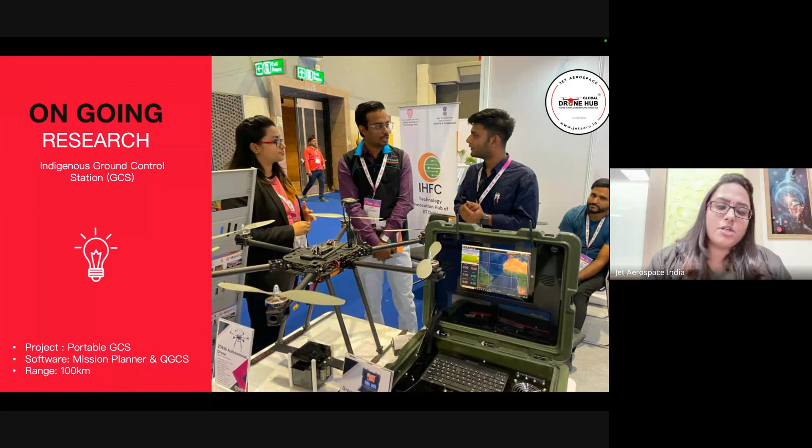We also have a project where we are working on our indigenous ground control station. A portable ground control station that can support the open source ground control station software, with a range of about 100 kilometers, that can be utilized for logistics and many other industries. That is the main idea behind the research work.

So some of our skill development projects. We are working with the Technology Innovation Hub of IIT Delhi under DST for the nurture program. We trained around 25 to 30 colleges and around 2,000 students last year. They all belong to the less privileged category. So it's technologically developing the people who require this technology. That's what we tried with them.

And these are the drone technology boot camps which we conducted at NIT Silchar, part of the capacity building program of the Ministry of Electronics and Information Technology. We also work with Tamil Nadu Skill Development Corporation. We are part of the Naan Mudhalvan program. Last year we conducted training for around 8,000 students along with this body at around 145 to 150 colleges in Tamil Nadu.

We are also working with Kerala's Department of Public Education. They are establishing drone skill development centers throughout Kerala in government schools. We have supported their COE, that is Center of Excellence for Drones, for the drone service technician trade. We have established this in one of the schools, and we are expanding the same throughout Kerala.

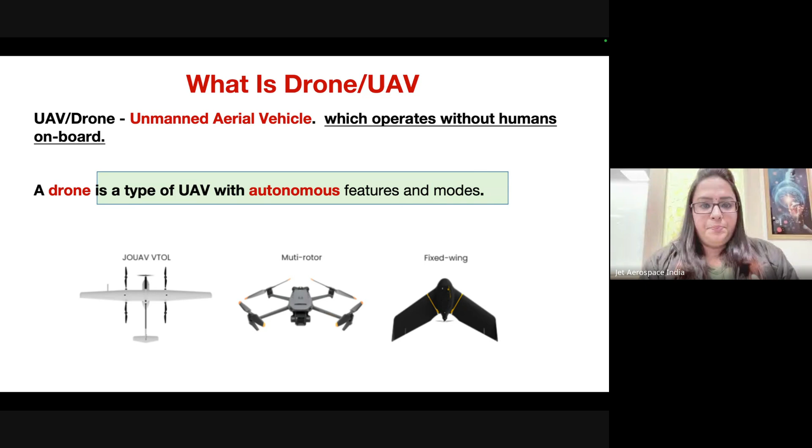We have given three pictures, a VTOL UAV, a multi-rotor, and a fixed-wing UAV, for understanding the different terminologies. An RC plane or fixed-wing UAV looks like an aircraft, works like an aircraft, and follows the aerodynamics of a real aircraft. It's remotely controlled. The term UAV generally represents any aerial vehicle flying in air without human beings. And of course, drones are capable of working with certain autonomous features. That's the key difference between the three terminologies we are using.

There is also a term called UAS, which is unmanned aircraft system. The unmanned aircraft system basically works for collecting, processing, and transporting the data. So what is an unmanned aircraft system? We are talking about both the control and the unmanned aerial vehicle together as the unmanned aircraft system. You will have a ground control station on the ground, and the vehicle will be flying in air. The collection of data, processing of data, and transporting the data to the ground control station will be the work of this unmanned aircraft system.

So, a glimpse of the drone rules that need to be followed. These rules are laid down by the Ministry of Civil Aviation, particularly the Director General of Civil Aviation. Basically, we classify drones based on their weight. Here we have nano drones, which are less than or equal to 250 grams, and micro drones, which weigh between 250 grams and 2 kilograms.

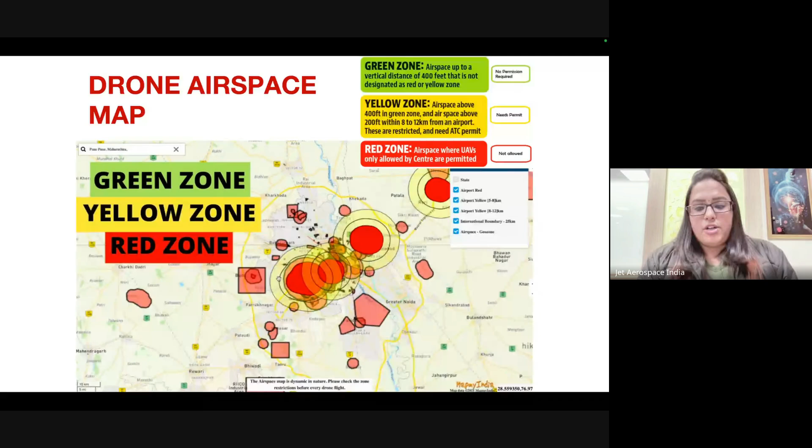In all these zones, the maximum ceiling of operation as per DGCA permission is 400 feet as of now. This will vary depending on the zone, even if you are near an airport or at an industrial corridor. So the government really emphasizes looking at the airspace map given on the Digital Sky platform to know whether your location falls under the red, yellow, or green zone, to obtain proper permission. All of you who use drones are requested to do that.

Of course, the unique identification number depends on the type of your drone and the purpose you're going to use it for, whether commercial or non-commercial. You register your drone with DGCA and get a unique identification for the drone.

I said that nano drones are exempted from getting any license for flying. Only the license and location permission are exempted. We are supposed to register even a nano drone and get the unique identification number. That's what is imposed by the Government of India.

And we have telemetry data. So telemetry data is like a module which is used for transmitting your drone data to ground. So whatever drone data like your speed, your altitude, your location, everything, all the data is given to ground wirelessly through telemetry data. So it's a module which is connected aerially to flight controller, and you have a ground module which will be connected to the ground control station software. So by communication between these two modules, you will be able to see the live drone data on ground.

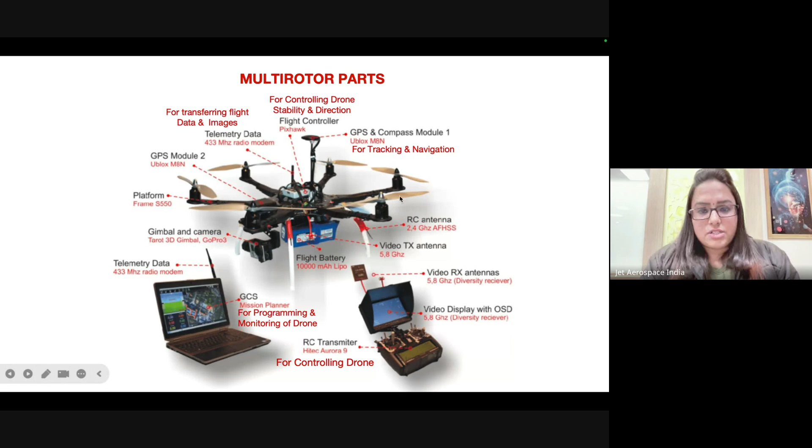Apart from that, you'll be having a receiver. So you have a RC transmitter, which is used in ground for controlling the drone. You have a receiver which will be attached to your drone. So these are the common parts which is there in most of the multi-rotors. And if we speak about the control of our drone, it is not only transmitter all the time. So if the drone is a high altitude, long endurance UAV, and if its payload capacity is very high, we will actually have a control station at ground. So this control station is called ground control station. So you will be controlling all the activities of that drone or UAV from this ground control station.

And this is explaining a specific ground control station of a UAV called Global Hawk. So Global Hawk is a high altitude, long endurance UAV. It has two control stations, and also a vehicle test controller. So vehicle test controller is a team working on ensuring the airworthiness of your UAV. So before takeoff, after landing, the vehicle test controller will be certifying the UAV whether it is airworthy to fly or not. So that's the work of vehicle test controller.

And now your control station one is responsible for the takeoff and landing of your UAV. And launch and recovery is referring to the takeoff and landing of the UAV. And we have mission control element, which is nothing but the UAV's mission, whatever work it is assigned for. The team at control station 2 will be controlling the UAV to complete that work, get the data, whatever is required, and to return back till the recovery zone of your UAV, after which this launch and recovery element will land the UAV. So this is the working of your ground control stations.

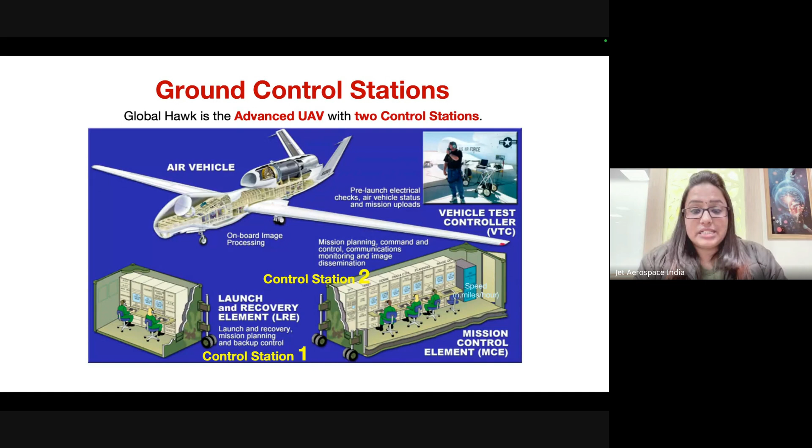So traditionally, earlier we were having ground control stations. You can imagine this is a cockpit-like setup in ground. So all your systems, whatever communication devices, navigation devices, that will be present real time inside this ground control station.

So now, if it is a smaller drone or a smaller UAV, we are using transmitters for controlling them. So now we are just moving on to the navigation and communication protocols which are followed for the drones. So the first thing we are talking about is the GPS, Global Positioning System. So basically GPS is a device which is used for getting the drone's location, and it is very much useful for planning all the autonomous activities of your drone.

So we all use GPS in our life regularly. So I don't have to say much about GPS. We all know what it is, how it works and all. But in case of drones, only if you have a GPS will these drones be capable of performing any autonomous mission, whether it is related to GPS or not. All the autonomous missions have GPS as one of their primary elements.

And GPS, of course, we know it is a satellite constellation, and different countries have their own GPS. And we use Global Navigation Satellite System, GNSS. Right. So that is giving you the drone's live location. The GPS is responsible for getting your home point or launch point where you take off. We'll record it with the help of GPS.

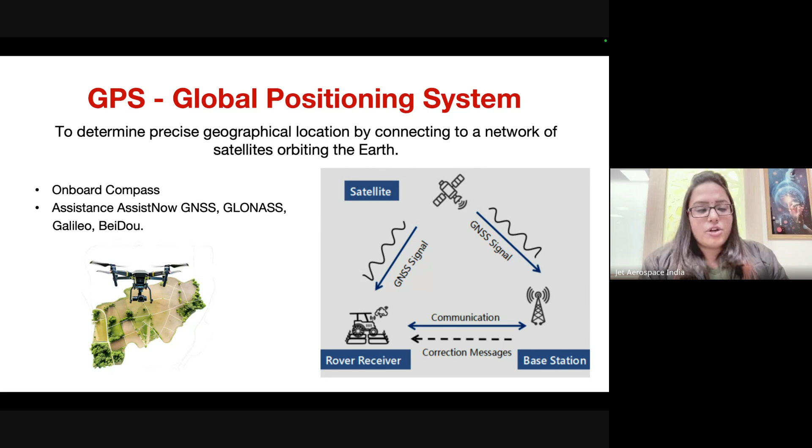And if you want to go for an autonomous mission, if you want to plan it, the mission planning is done with the help of GPS location only. And all your waypoints, any autonomous or intelligent mode that you want to do will be dependent on GPS. So that is the role of GPS in terms of your navigation or guidance.

So now, even though we use GPS for our positioning and tracking, there might be certain errors in our GPS. So RTK is a system which is abbreviated as real-time kinematics, and basically it is making our GPS data more accurate and precise. So if you compare, there can be a meter-level accuracy difference in GPS data, but there will be only a centimeter-level accuracy difference in RTK data. So this is the difference between your RTK system and a drone which just has a GPS. So RTK will be used in combination with GPS for obtaining better accuracy in mapping and all GPS-based operations. So that's your RTK.

So you'll be having a base station. We'll have the GPS mounted on the drone, and you will also have the GPS satellite in the picture. So it's a triangle communication between the base station, the drone, and the GPS. So whatever GPS data you have captured, if it needs some correction, that will be imposed by the RTK system which we are using. So that's the use of RTK.

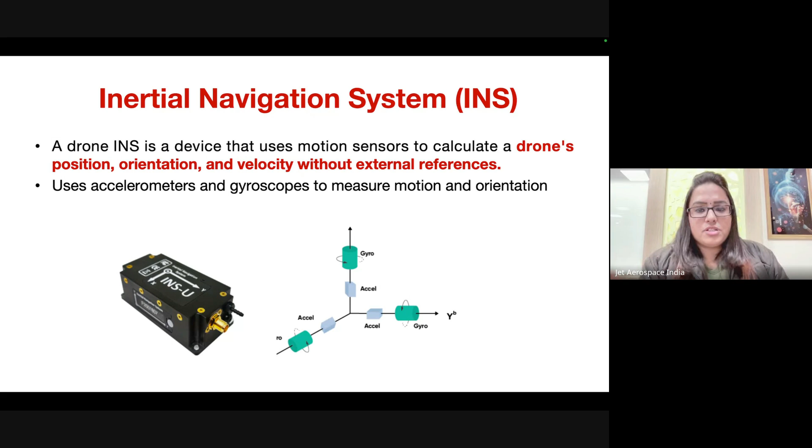And you have the inertial navigation system, which is very predominant even in our aircraft. So the inertial navigation system is nothing but navigating with the help of inputs from sensors like gyroscope, accelerometer, magnetometer, barometer, etc. I have their briefing later in my upcoming slides. But just for understanding, with whatever input we are getting from the gyroscope, accelerometer, and the other sensors working on the inertial principle, we will be able to control the drone's stability, and to some extent the orientation and position of the drone can be corrected with the help of this inertial navigation system. That is the work of INS.

So now MAVLink is a protocol. MAVLink is micro aerial vehicle link. It is a protocol followed by the ground control station and drone to communicate with each other. So MAVLink is precisely the protocol followed by telemetries used for drones. It supports all your waypoints, which are nothing but the autonomous flight planning missions, the telemetry data, and any control command which we would like to pass from the ground control station to your drone.

And it is used by PX4 or ArduPilot flight controllers. All the flight controllers support this MAVLink protocol. So it's wirelessly transmitting the data between the ground control station and your drone. That's MAVLink.

And apart from MAVLink, we use a radio receiver for controlling the drone. From the ground you use the radio transmitter, and aerially we use the radio receiver. So there are certain radio receiver protocols which are followed for the communication between the radio-controlled receivers and our flight controllers. We'll see the communication protocols one by one. So usually the operating frequencies are 2.4 gigahertz, 915 megahertz, 433 megahertz. So depending on the range of operation, the distance to which you want to fly the drone, you can select this frequency band for the radio control devices that we are using.

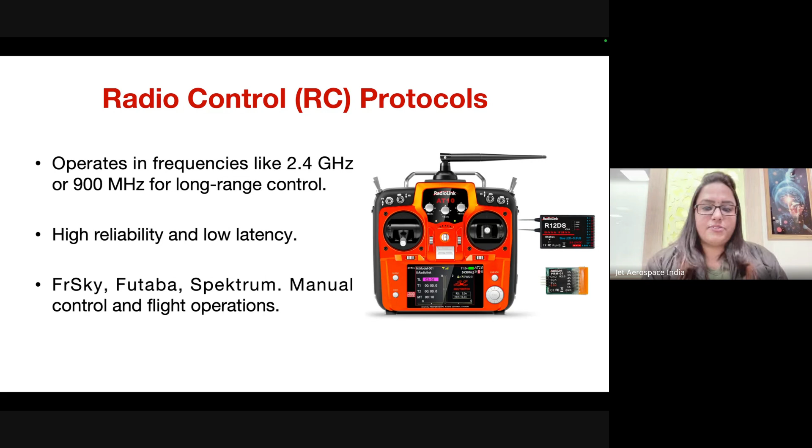So the first protocol is LoRa, which is long range. Basically, you will have a kind of topology for any network whenever you are connecting. The LoRa network follows a star topology. It is a protocol used for connecting your drone to any ground control station that you are using, right?

And the next protocol is ZigBee. ZigBee uses both star and mesh topology. In star topology, all the devices communicate with a hub for getting the data. But in mesh topology, the devices can communicate with each other. So this protocol uses both these topologies for communication.

And the next protocol or module that we use with drones is ELRS, ExpressLRS, Express Long Range System. It uses the Crossfire serial protocol. It has high bandwidth and very low latency. It is a bidirectional serial communication protocol.

So ELRS can control both your radio control transmitter and receiver signals as well as the telemetry data. The purpose of ELRS is extending the range of operation and also reducing delays and any errors happening during transmission. So that's the idea.

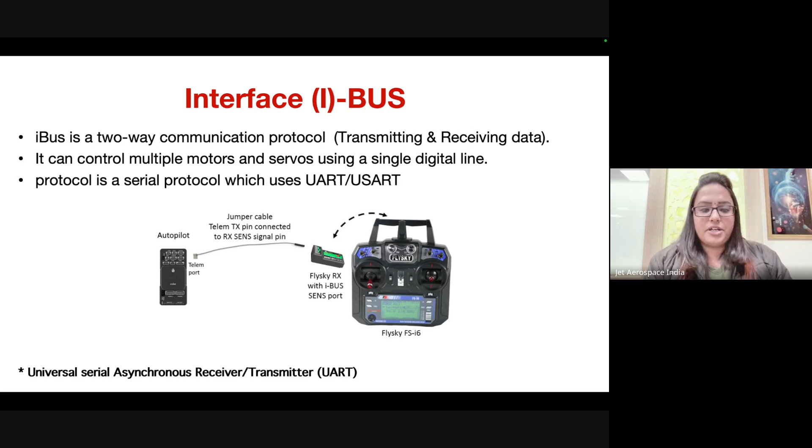And serial I-bus is an interface protocol. That is also a two-way communication protocol. It uses the universal asynchronous receiver transmitter, UART. It is also a single connection that can transmit and receive data. This I-bus is particularly used by brands like FlySky. So this is your I-bus protocol.

So far we discussed the protocols for communication between your receiver and the flight controller system. Now we are moving into the actual communication systems available: the command and control communication system. As we already saw, the ground control station I explained earlier is a traditional ground control station, which is basically a fixed ground control station on land.

The picture you're seeing here is a portable ground control station. It has all the capacity of the traditional ground control station, but it is very small in size. From the ground control station, we can control the drone, gather the data of the drone, and gather the data of the payload you're carrying. You can do all kinds of drone operations from the ground with the help of the ground control station.

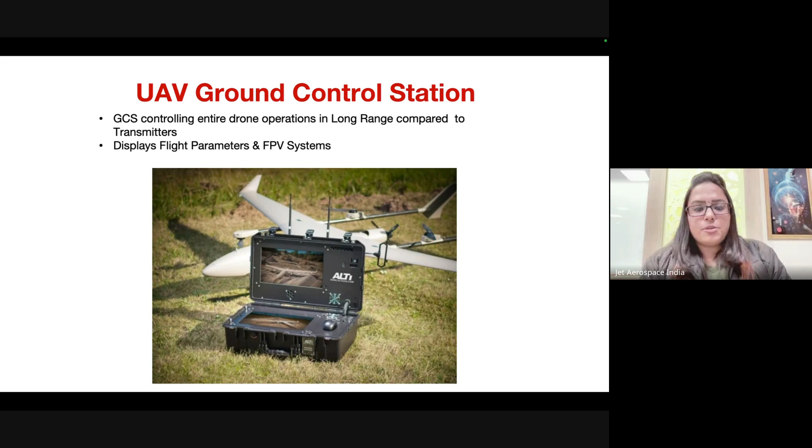It also shows you any FPV, like the camera imaging system, payloads like spraying systems or other sensing systems. All the data can be detected from the ground control station. So this is a portable ground control station. This is a traditional ground control station. So you can see the difference.

So there are traditional ground control stations, portable ground control stations, and handheld ground control stations. A handheld GCS is smaller than a portable ground control station. We can see the data, operate the drone, everything from a very small accessory. That is the idea. But for all ground control stations, the capacity and efficiency remain the same. Only the size is different.

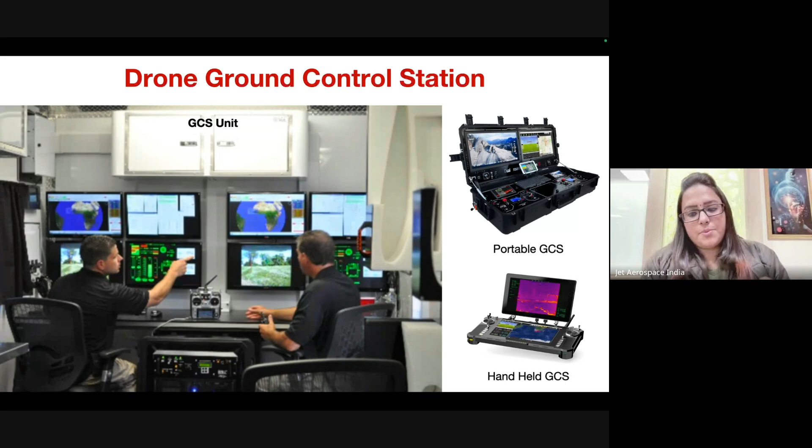Considering the fact that if the GCS is fixed, you cannot operate your drone beyond a certain radius of the GCS. So if it is a portable GCS, we'll be able to carry the GCS and operate the drone anywhere. That is the idea with this portable ground control station.

So whenever a transmitter is being used, the transmitter uses frequencies like 2.4 gigahertz, 5.8 gigahertz. And I said that the telemetry frequency is already 900 or 915 megahertz, 433 megahertz and all. Usually a 2.4 gigahertz frequency can give a range of about 1 kilometer in a basic transmitter. So if we are changing the frequencies and certain components in the transmitting and receiving system, we will be able to change the range, the distance of operation of our transmitter receiver.

So there are devices like signal boosters. If you would like to extend the range of your transmitter and receiver signal transmission, then you can use these signal boosters. They are devices or accessories that can be attached to your transmitter, something like antennas with different geometry, so that they can extend whatever signals they are transmitting.

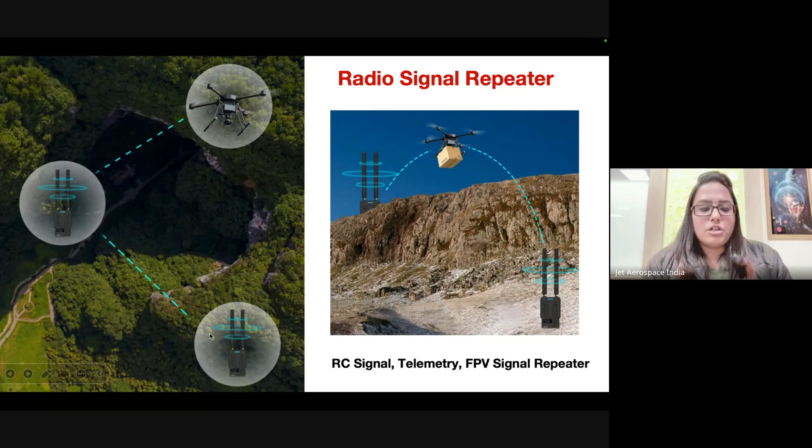Therefore, you can keep a repeater. At an intermediate point between the drone and the ground control station or transmitter, whatever controlling element we have, we can place a signal repeater that can capture the main signal and relay the same to the drone, so that you can be sure that the promised range is obtained by the drone and the transmitter.

So this is our radio telemetry system. I just gave a brief note already. These are your modules. A radio telemetry system will have two modules, an aerial module and a ground module. The aerial module will be connected to your flight controller. The ground module will be connected to your mobile phone, and it will give you the data displayed on the GCS software. So the aerial module will transmit the data from the flight control board to this ground module. This is its work, and you can see both of them.

The ground module will have a provision to be connected via USB, and they generally use 433 megahertz or 915 megahertz. If you want longer range, you can go for 915 megahertz, and if you want a lower dispersion rate from obstacles, we can select 433 megahertz frequency.

So far we were talking about the drone's control, the drone's transmitter and receiver. Now we are talking about the FPV system, which is your imaging system, first person view. FPV has also got a transmitter, receiver and telemetry system. The FPV telemetry system can use many types of data links like Bluetooth, Wi-Fi, other internet-based protocols, or it can use radio frequencies as well.

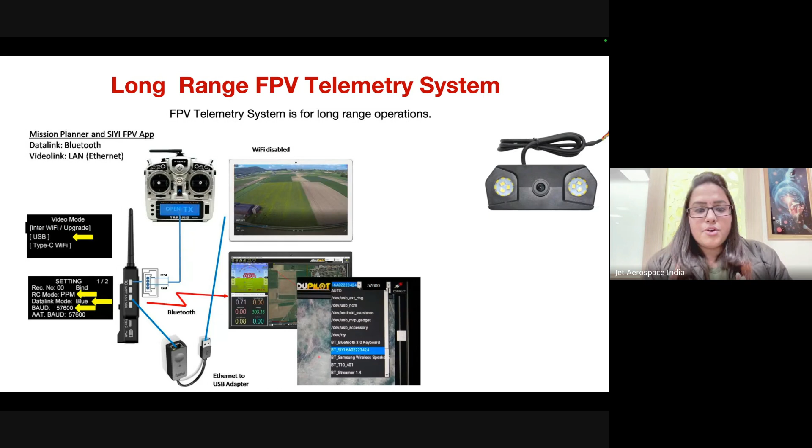So the sensors that we use for the navigation purpose, that will be my accelerometer. Accelerometer is a sensor or a device that senses the acceleration of the body. So basically, what we do as programming for your drone is you calibrate all the sensors to finally obtain stability. The accelerometer is present in the flight controller of our drone, and we will calibrate this accelerometer for getting proper acceleration measurement during the operation of the drone. So that's the work of the accelerometer.

So the calibration will involve moving the drone on different axes, in different positions, to understand the drone's movement and acceleration. So that's your accelerometer and accelerometer calibration.

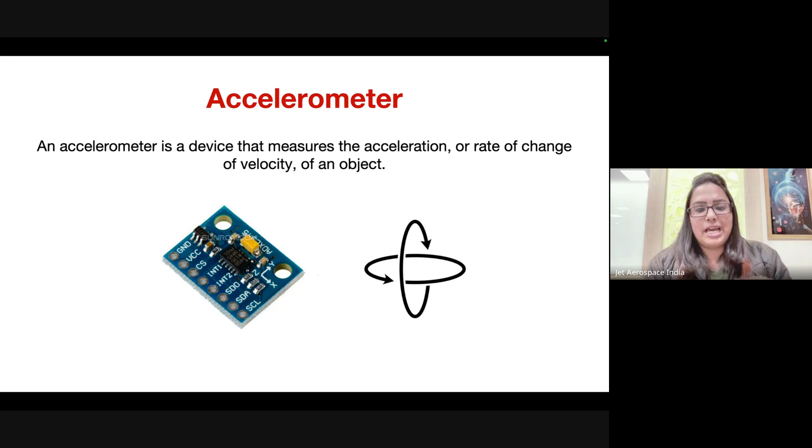Now comes the gyroscope. A gyroscope is a device that is even present in our mobile phone. Many of you might have seen, when you're using your mobile phone for GPS particularly, it will ask you to make an infinity with your phone. Games like Temple Run and PUBG all utilize this gyroscope facility. You will be moving your mobile phone, and the character seen on your phone will actually move without giving any input from your hand. Simply if you tilt your phone, that character will move. If you do infinity, the phone will sense it. All of this is because of the gyroscope.

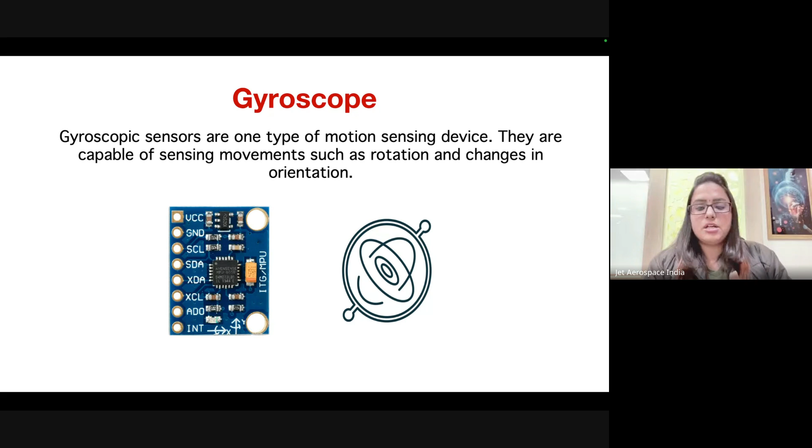So whenever you place a gyroscope on any body, it will sense the position of that object, its position in your axes, X, Y, and Z. And if there are any issues in terms of stability, the gyroscope will correct it by providing its input to the flight controller. So that is the work of the gyroscope sensor, and that will also be present in the flight controller.

So this is our magnetometer. It is very important to know the direction or heading of the drone. So the magnetometer will be helpful in understanding the magnetic field, with the help of which we'll be able to...

I'm sorry, somebody's mic is... who's it? Priya, Priya, please mute your mic. Yeah, thank you.

So the magnetometer is a device which is used for understanding the heading of your drone. It is a sensor present in your flight controller. By understanding the magnetic field, it will show you north, south, west, east, the directions, with the help of the magnetic field strength.

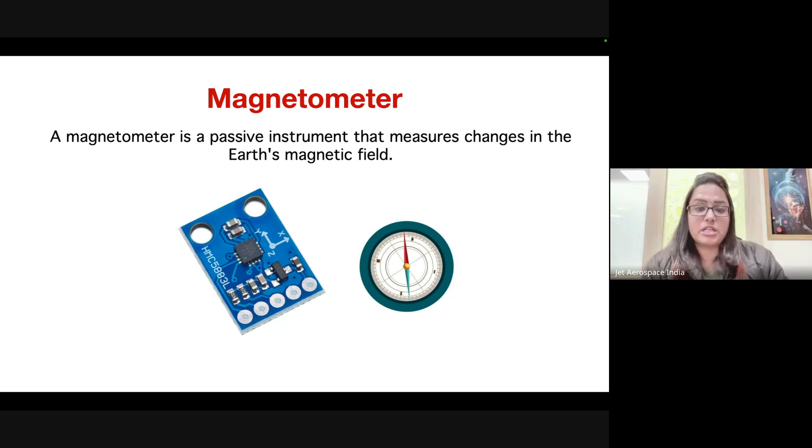And then we have the barometer. We have to sense our altitude, and altitude is sensed with the help of the barometer. By understanding the difference in pressure whenever your drone is traveling, we'll be able to know at which altitude we are flying the drone. So that's the barometer.

Many of you belong to mechanical and many other backgrounds, so you might have seen mechanical devices. But these sensors will be embedded in our flight controller, which most of the time are not visible, but they will be present inside your flight controller. They will be calibrated whenever you are using them for drone operations. So far we have discussed the communication and navigation systems and their sensors.

So now we are going into some of the advanced guided techniques and modes available for drones. Apart from the traditional methods we discussed, nowadays you can use certain advanced features for navigation of your drone. This is visual navigation. Visual navigation is usually done with the help of cameras and also some optical flow sensors that are used for understanding the light. In visual navigation, you see the first-person view through the camera and you control it. So that's your visual navigation.

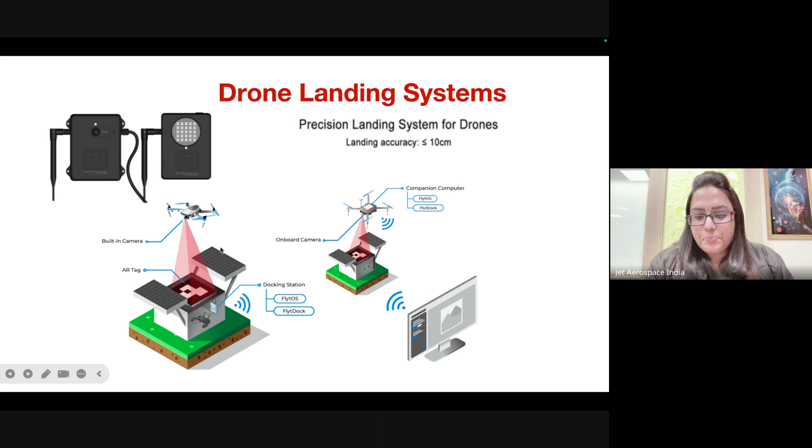And lidar systems, of course. So if you're going for mapping, we'll be giving autonomous path planning, and lidar-based systems will be helpful both for mapping a location, getting the data of the geographical area, as well as for understanding the obstacles present around us. For people who don't know, lidar is light detection and ranging. Basically ultrasonic sensors use sound waves for understanding obstacles. Here in lidar we'll be using pulsed laser light. The dispersion of laser light will be utilized for understanding the presence of obstacles, and even for mapping if you want to map a geographical area.

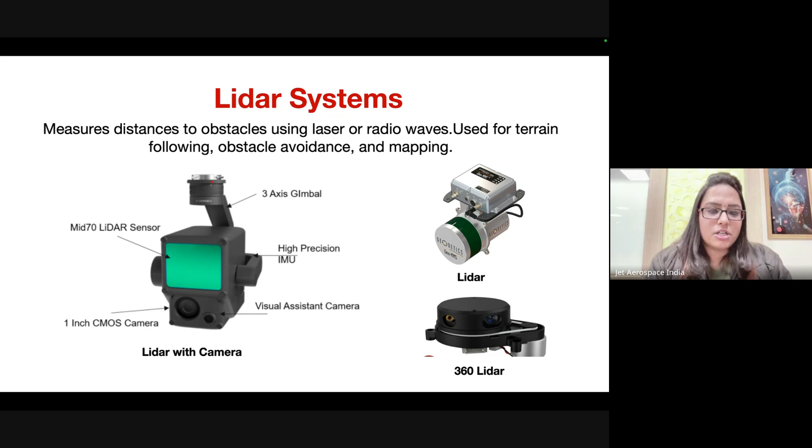So LiDARs are like 360 degrees. Of course, you can select it as per the precision and accuracy you want. And this is our unmanned traffic monitoring or unmanned traffic management system. Right now the number of drones and their commercial applications are very few in India. Soon we are expecting the commercialization of drones and drone-based services at a very high rate in India. So imagine you are getting your parcels delivered by drone, or you are traveling somewhere using an air taxi or a drone taxi. So logistics and transportation, both industries require a traffic management system.

Right now a pilot is piloting one drone, and he knows the location of the drone. But if in the same location there is another pilot flying his drone, he'll not know that there is another drone flying in the location. Even the government does not have proper knowledge of how many drones are there inside the country, whether they are flying at this moment or not. So this unmanned traffic management system will bring a very good platform for the commercialization of drones.

Basically, the unmanned traffic management system will help connect these drones to a centralized system like the ATC we already have for aircraft traffic management. And it will provide a navigation aid, a proper traffic management and monitoring system. So this is a platform, or software, that needs to be developed by India. It is actually being developed by some network companies partnering with DGCA and civil aviation bodies. And swarming of drones.

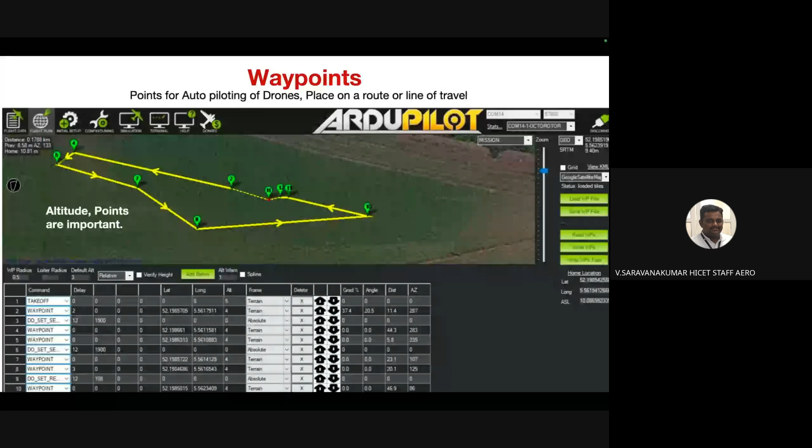After the course lock, we have return to home. So whenever your drone has any problem, like the battery level of the drone is very low or there is a signal interference, then your drone will automatically come back to the takeoff point and land without input from the pilot. So that's called return to home. That can also be considered a smart feature and a guided system that is present in the drone.

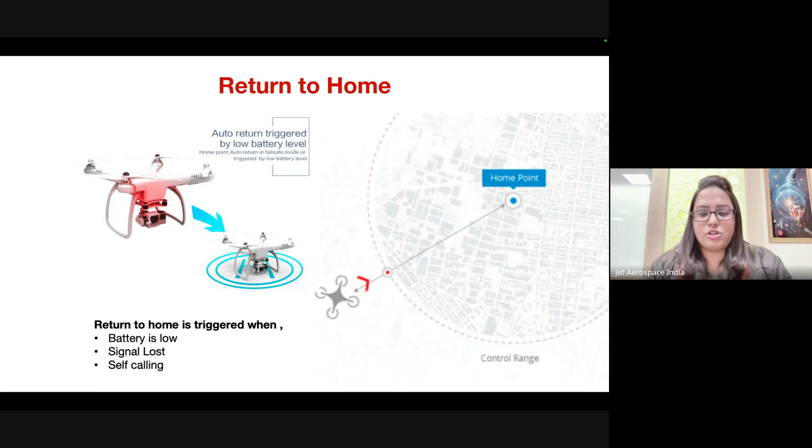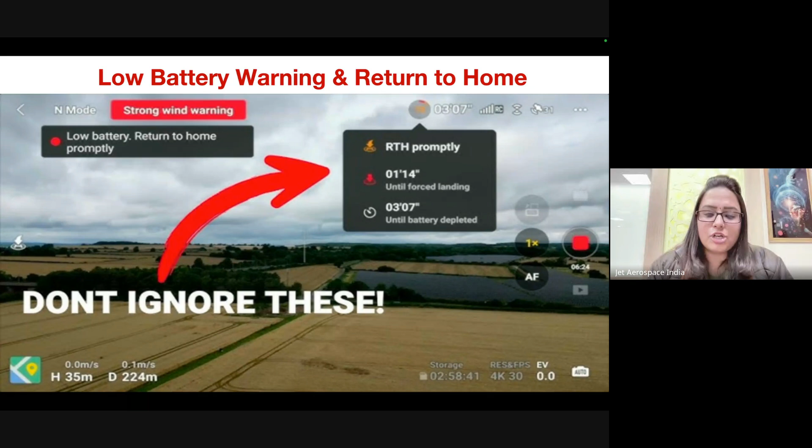So apart from automatically getting triggered, we can also call the drone back. You'll be having designated channels in your transmitter, or an option in your ground control station, to call the drone back when it has autonomous capability. So the next thing is low battery warning. We'll be able to see the battery percentage in our ground control station software. This low battery percentage is set by us. You can keep it as 12%, 15%, so that at least this 12% of energy it can utilize for coming back to the home point.

So emergency landing. Apart from return to home, you can also give a command called landing. If you know that you're going to operate either indoor or in a very small visible location, then you can go for emergency landing. The drone will automatically land without coming to the home point. Wherever it is, it will reduce its altitude and it will land.

So geofencing: we will be able to create a virtual boundary using the GPS coordinates and the geographic data we have. Geofencing is like you designate that the drone will only travel either 40 meters or 60 meters, even though the drone has capacity to go 3 or 4 kilometers. If you designate this geofence, the drone will not move any further than that distance. This is usually done to protect your drone from getting lost, or if you have some highly secured area near you where it's not favorable to fly drones, you can give a geofence to the same.

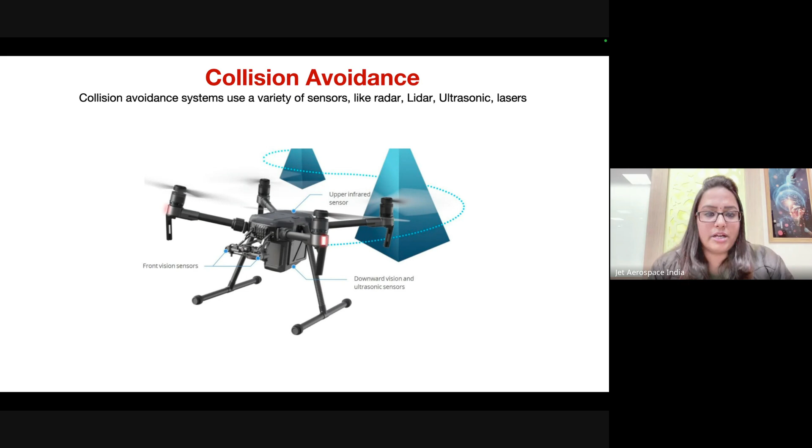Collision avoidance. You use sensors like lidar, ultrasonic, and radar-based sensors for understanding whether any obstacle is present on our way. If there is an obstacle, the drone will avoid it without hitting or colliding with it. The drone will try to restrain the movement forward. So that's your collision avoidance.

And terrain following. There are terrain following radars that can be connected to your drones. You just understand the land topography. If it is flat land, you will maintain, let's say, an altitude of 10 meters or 7 meters from ground. The same altitude will be maintained even if the land is not level or flat.

If it is a bumpy area, mountainous area, this altitude will be maintained on whatever kind of topography of your geographic land. So that's your terrain following, or terrain following radar.

Altitude hold, position hold, we can also say that. So the drone will be fixed at a certain altitude in this particular mode. Even if it is having some instability moving horizontally, the altitude of the drone will remain fixed. The drone will not oscillate in the vertical axis. That's altitude hold. And there is something called position hold in DJI drones and some advanced flight controllers.

Position hold is nothing but, when you just place a drone at one particular location in air, the drone will hover even if you're not giving any input or touching the controller. The drone will still remain in the same position. Even if it is blown away by any kind of gust or other factors, the drone will just come back to the last position where it was hovering. So that's called position hold.

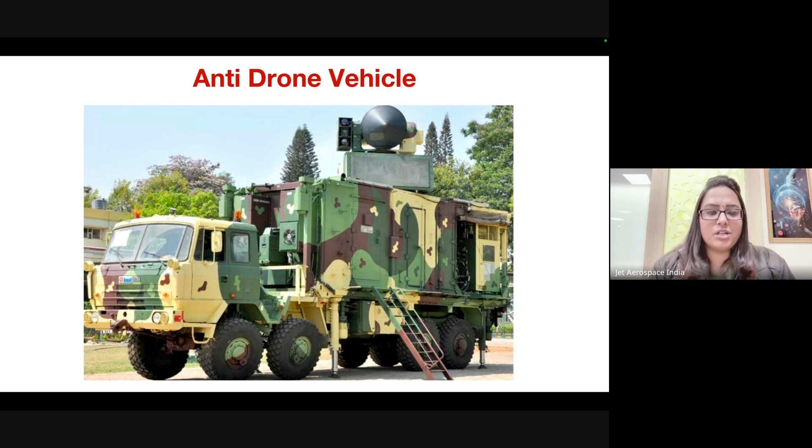And there are radars dedicated to drones. We know about the radars we see in movies and in ATCs; they are for actual aircraft. There are radars that can specifically track the movement of drones in a particular locality. These radars will be useful for UTMS, unmanned traffic management system. And anti-drone vehicle: if you fix the jammers and all the anti-drone systems in a vehicle and move it around, we call it an anti-drone vehicle. It will be very helpful for border surveillance and military operations.

There are other drone warfare-based systems: you can launch a missile with tracking capability to destroy any target, and many other bombs can be dropped using a drone. If you want to conduct aerial warfare with drones, even recently a country used a voice simulator of babies crying to bring out the people and bomb and kill them. We call it decoying. Decoying is using a tactic to bring the attacker forward. These types of technologies can also be done with the help of drones.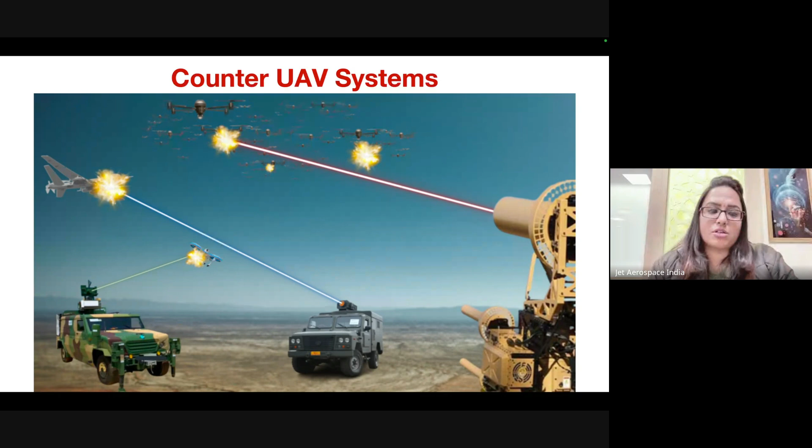A counter UAV system is when there is any UAV coming inside our guarded and protected premises and you want to stop it. Again, we are talking about the jammers. In case jamming is not possible, they will try to shoot down the drone or destroy it physically.

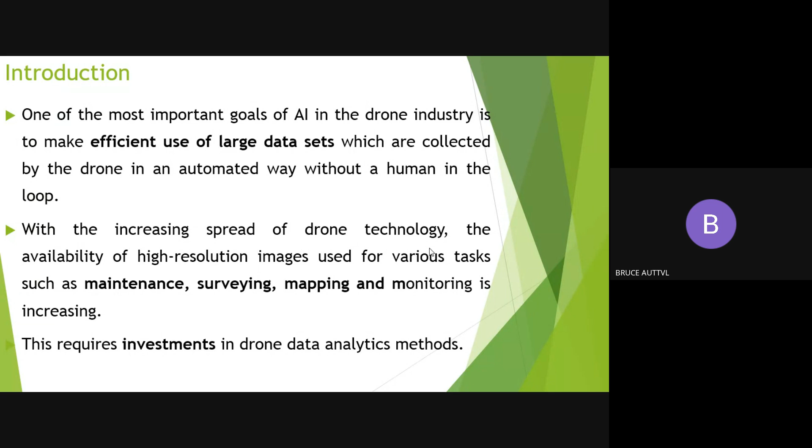So basically, if you are considering image data collected through the drone, we may collect 1K, 2K, 4K or 8K images. Let's say 4K resolution is required for your application, and we know that if you are taking a photograph with 4K resolution, it will be maybe 10 MB or 12 MB, even more than that. The size of the file will be more than 10 MB or 12 MB, like that.

So what happens is, if you want to process a large volume of images, for example, if you are going to use the images for some deep learning or machine learning based analysis through AI, you need at least 5,000 or 10,000 images for a particular application. I will tell you the real-time cases also in the middle of my presentation, how we suffered, how we experienced various difficulties when we collected the 4K images for a specific analysis.

So if you do that, 5,000 images means the data will be several GB. So how this data can be transferred to the GCS, ground control station, or how it is loaded to the cloud, what kind of transmitter receiver you are going to use onboard the drone, that is a big challenge. Basically, the entry level drones and the research purpose drones may not be able to fulfill those real time applications.

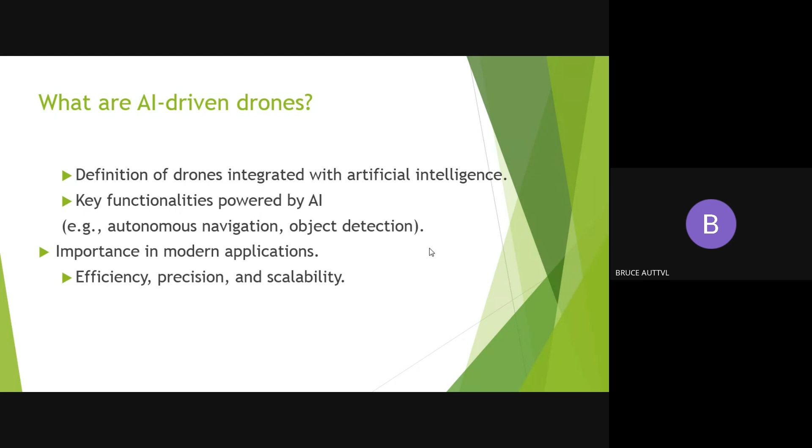So the core components of these AI driven drone systems start with the sensors. Maybe it is a lidar or inertial measurement units or camera or whatever the sensor may be. Nowadays we are using firefighting drones, which use smoke detection sensors. So the sensor can be a specific transducer, selected based on our application. Then processing units: graphics processing units, tensor processing units, GPUs, TPUs, and actuators and control systems. These hardwares are something different from your basic conventional drone system.

The typical hardware of your conventional drone is your flight controllers, motors, conventional propellers and frames. All those are the essential hardwares for your drone, but here it is something different. You can see the GPU, TPU. That is the most essential thing to process a large volume of data in a shorter period of time without any human intervention. Then softwares, AI algorithms for perception and decision making, and communication systems for real-time updates. These communication systems also need to be developed indigenously, because nowadays we largely depend on imports. So the software part, the first part, is AI algorithms for perception and decision making.

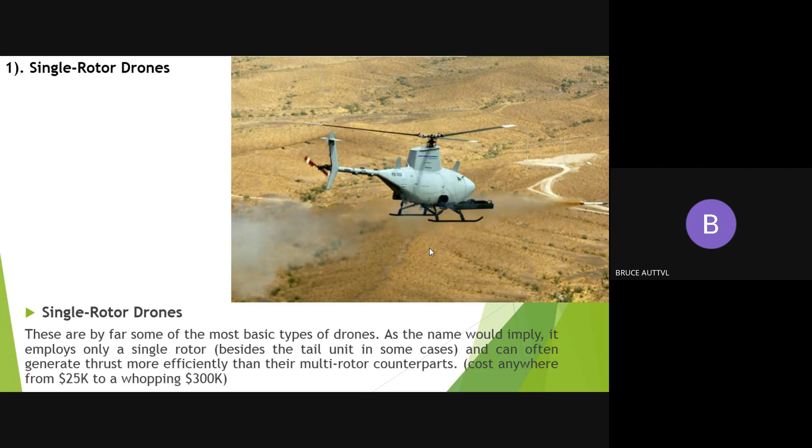These micro drones, especially the FPV drones, first person view drones, are playing a crucial role in the tourism industry. If you want to see the valley, or the beauty of an inaccessible place, you can operate these FPV drones over there, and you can enjoy the views locally. So definitely it is going to make a bigger transformation in the drone industry.

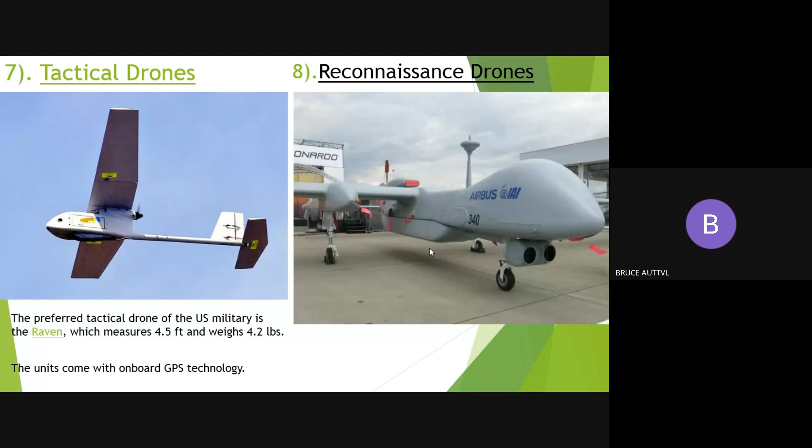But as of now, privacy and other concerns are there, and maybe with the help of AI and automated systems in the near future, these FPV drones will definitely transform the current phase of the drone industry. Then these are tactical drones, and these are reconnaissance drones, exclusively developed for military applications. Then large combat drones and non-combat large drones are there.

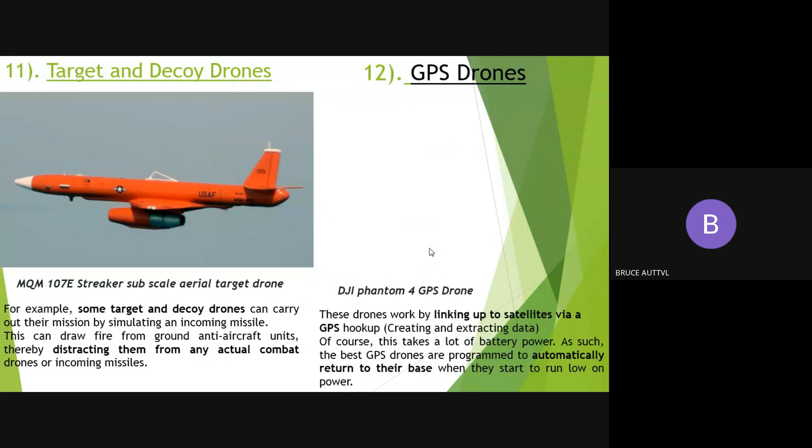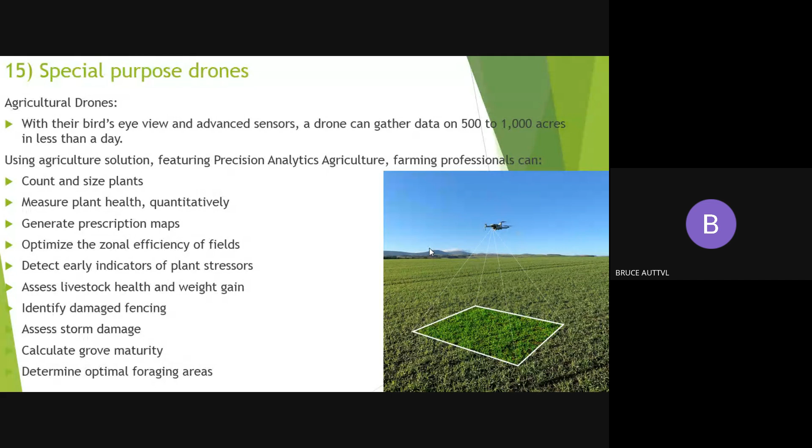So target and decoy drones, GPS drones, photography drones, racing drones are there, special purpose drones. Even beyond that, many applications, many types of drones are there. Altogether, I am calling them special purpose drones. Now, why I am giving the types of these drones in an AI-driven systems based presentation is that each and every drone has a specific application, and for that specific application, the data collection process and data analysis will be entirely different. That is the thing you should understand.

For example, if I am talking about serial number 5, small drones, we will take some good sceneries, good photographs using these drones. If you are going for a holiday picnic, you will take some images, and you may utilize it for a minimal survey application. For this application, your data collection will be restricted to some specific volume, and the accuracy needed is maybe the 1K image. For that, this small drone is sufficient.

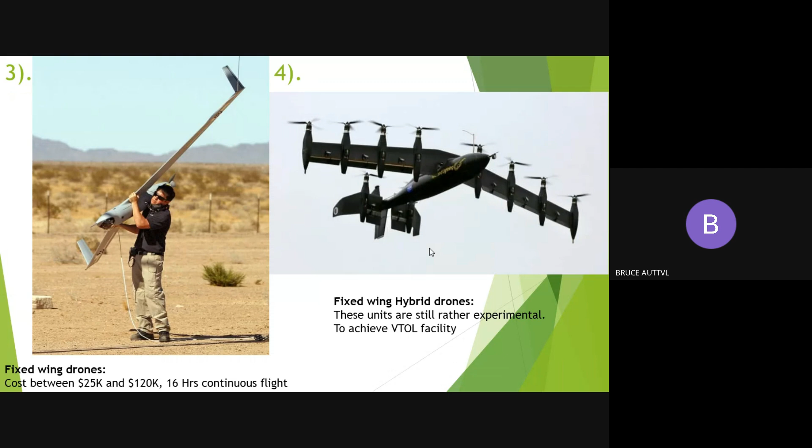But if you talk about some large scale application, if you want to have a closer view, for example, of a wind turbine blade when it is actually installed, you can use an FPV drone, or some other drone with more than 1K resolution. So for that, when you do the data collection, you need to have a different transmitter receiver system.

You need to have a high data resolution, high data transmission rate. So for that, if it is a customized drone, you can modify specific features. If it is a DJI drone, or it is a non-customized case, then you have to change the entire drone for your requirement. That is the case. So again, this is the hardware side.

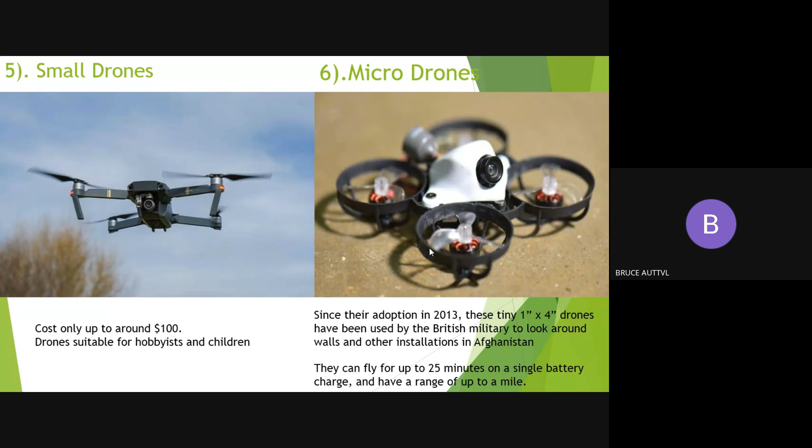Once you change the hardware side, whether the data you are going to collect can be converted into the useful form or not. If it is not so, then again your investment will be wasted. So that's why I'm giving these types of drone. So though we are talking about software side, AI tools and all, the person who is going to do the data analysis should be familiar with these types of drones and their capabilities. So once they give some raw data in an unreliable form, the entire process will be wasted. So that is the thing.

Then, for example, if you are selecting an agriculture drone, I'll confine myself to this type now. Are you wanting to map small fields or hundreds of acres? Will you fly tight, craggy ranching terrain, or wide, flat swaths of Iowa corn? And do you grow crops in cold, windy, and wet areas, or in a temperate paradise?

So if, for example, you are mapping hundreds of acres, then what about your multi-rotor configuration? Is it capable to cover 50 acres or 100 acres of land in a single day? Though you are doing some battery swapping or whatever advanced mechanism you may have, is it possible to cover? So for that case, as compared with your multi-rotors, maybe you can go ahead with a hybrid or fixed wing counterpart. Then what about the terrain? What about your temperature?

These things play a vital role, because if it is a windy region where some 7 to 8 meters per second wind is there, and the actual endurance of your drone is 40 minutes, with 7 to 8 meters per second of wind, that too some gust, non-uniform wind, the endurance suddenly drops to 25 to 30 minutes. So if you are using some RTL mode after some 30 minutes, the battery will be drained. If the person is not aware of all those fundamental aspects of the drone hardware, they will spoil the drone simply. That is the case.

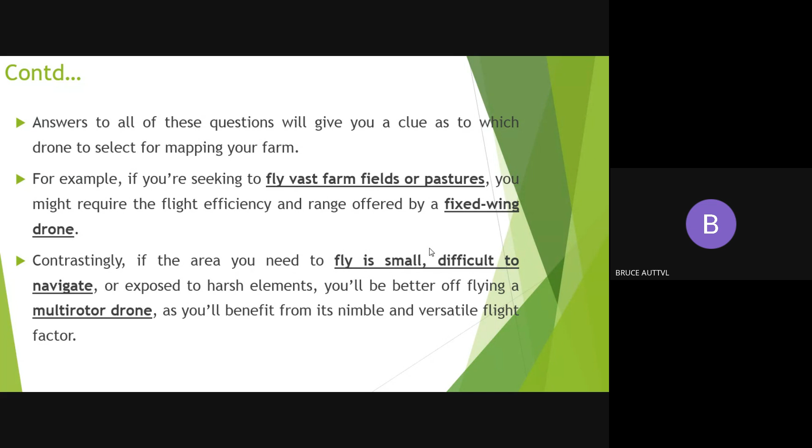So, for example, if you are seeking to fly vast farm fields with pastures, you might require flight efficiency. So, as I told you, a hybrid or fixed wing drone is more suitable. If you are going to use your drone for a very small application, maybe for an artificial drone pollination process, bee drones, then it is very difficult to navigate, very difficult to control. So you need to customize your drone with multi-rotors, and you have to operate the drone according to the local wind speed and the local conditions which are suitable to have a safe operation.

So these are other important parameters: form factor, flight time, sensor payload, range, even the wireless range, that is the diameter representing the farthest distance away from the operator the drone can fly. Though we are using nowadays VLOS only, visual line of sight, this wireless range is very crucial. This is typically much less than the physical range. Regardless, in the United States, it is illegal to fly your drone beyond your visual line of sight. Even BVLOS is not authorized here without proper authorization.

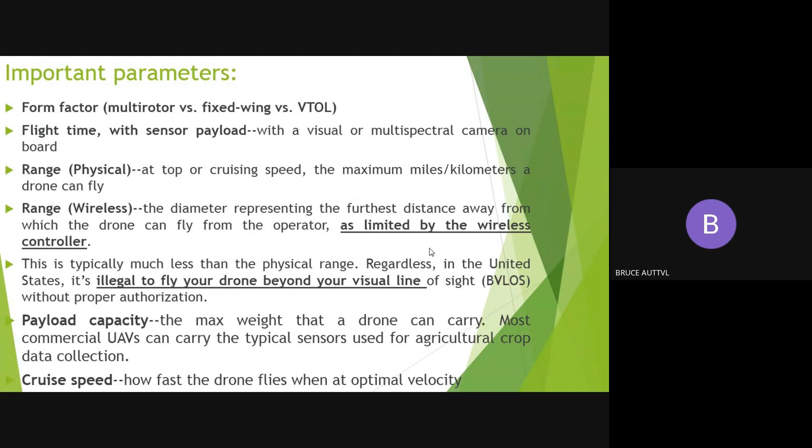Then payload capacity, the maximum weight that the drone can carry. For example, if you are adding a lens in your mapping drone, or some auxiliary system, the battery will be drained quickly. So according to the hardware integrated with your system, the data transmission capabilities, and the cosmetic changes incorporated in your system, you have to customize the battery. Sometimes you need to add more cells in your LiPo battery, or you may need higher mAh batteries. So according to that, we have to customize payload capacity versus range. Then cruising speed, how fast the drone flies when at optimal velocity.

Automated crop scouting software uses your phone to fly the drone, automatically collecting data at key points in your field. It is capable of distributing pollen at a specific rate across the specific broad strip, so we can control the pollination process. Then it creates the field reports on crop health, problems, and progress.

So for this automated crop scouting software, we have tried with a banana farm in the southern part of our state. We have utilized a drone in order to collect the data. Actually, we have utilized it for crop counting as well as crop health monitoring.

And we have collected around 5,400 images from the particular field, and we have identified several common diseases and several vitamin deficiency patterns from the agriculture department, and we have utilized the RoboFlow tool. You can Google it afterwards, RoboFlow. And we have trained all those images with our machine learning model.

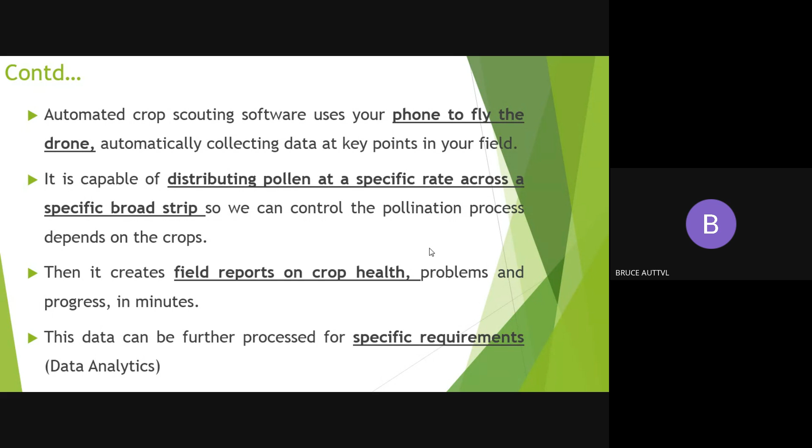So these are the illustrative examples I am giving. AI-driven drone technology can be moved to the next level to sort out all these real-time gaps that exist in the industry.

Now these pollinating drones. Walmart has filed a patent for robotic bees that would pollinate crops like the real insects. The scarcity of bees is a real challenge now because of the excessive use of pesticides; it is declining now. So what we can do is develop these pollinating drones, robotic bees for autonomous pollination, though it is against biodiversity, it is against nature.

Food insecurity is a serious challenge, especially with the abnormal weather patterns prevailing now. In order to ensure food security, it is an essential step we need to take. And this one is the system developed by the university research team at MIT. It is capable of pollinating plants very similar to the real insects.

It would pollinate the crops significantly better than crop dusting, and about 1/3 of the food we consume, fruits, vegetables, herbs, and spices, depends on pollination from honeybees. So pollinating drones monitor the crop health, its hydrophobic and hydrophilic nature, and aging patterns as well.

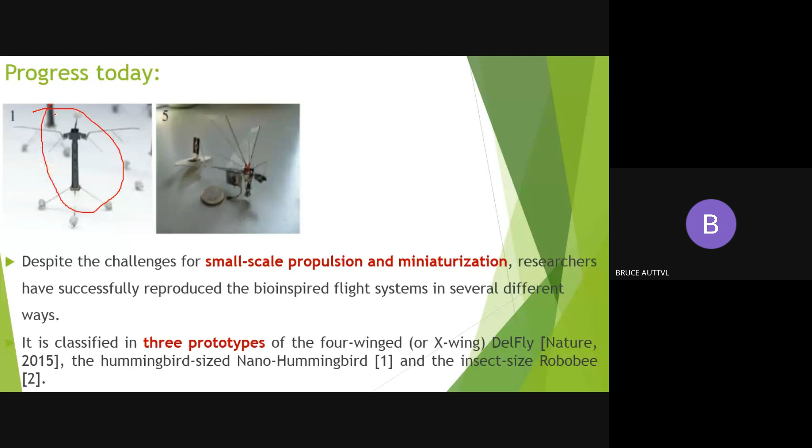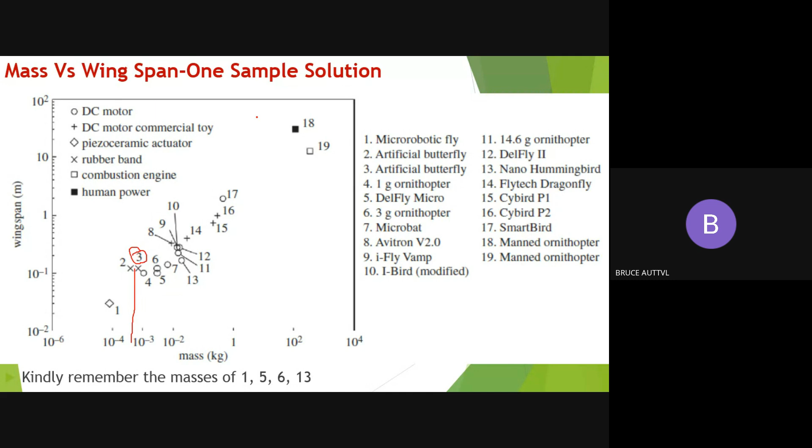Despite these challenges for small-scale propulsion and miniaturization, researchers have successfully reproduced the bio-inspired flight system in several different ways. Here you can see serial number 1, the micro robotic fly. This is at a research level. And serial number 5 is your DelFly Micro, and serial numbers 6 and 13: 6 is your 3 g ornithopter, and 13 is your nano hummingbird. You can see the nano hummingbird here.

All these illustrations are available in these two references: Science, Technology and the Future of Small Autonomous Drones, published by Nature Journals, and Design, Aerodynamics and Autonomy of the DelFly, Bioinspiration and Biomimetics Journal.

So for entry-level researchers, you can refer to these articles in order to have better insights about it. Then, okay, we'll move on to the advantages of AI and IoT for spraying drones. Particularly when you incorporate AI and IoT systems for the spraying system, it is easy control. When you determine how much fertilizer is needed for the particular crop according to the crop health data, crop analytics, crop data we have, intelligent flight and autopilot modes can be selected according to real-time and environment data.

So here, not only with the crop health and crop statistics, but also with the environmental data. What is the localized temperature? What is the wind speed? Whether it is favorable for the drone operation. So all those environmental data can also be customized. And if it is handed over to a farmer who is trained basically with the drone operation, these intelligent flight systems can warn the particular operator: it is non-favorable, the wind speed is not suitable to operate the drone as of now.

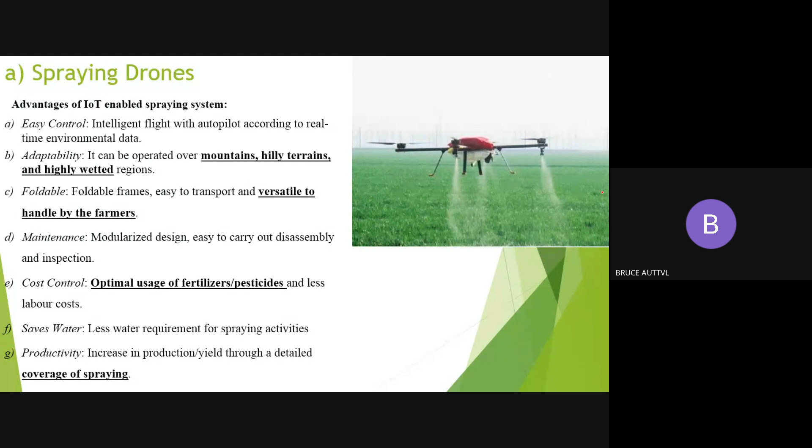So there is less water requirement for spraying activities, productivity increases, and when we are using these unmanned aerial systems for spraying activities, crop damage will be substantially reduced because of the reduction in human movement inside the field, and it is uniformly applied. So all those things are very crucial advantages with the help of these IoT devices.

Other roles of drones in agriculture can be improved with AI-driven technologies: soil analysis and field planning, seed pod planting, crop monitoring, pesticide spraying, irrigation planning. Irrigation planning is very crucial, and maybe while giving the applications of drones, I will give more insights about irrigation planning with the help of drones. Crop health assessment, I have explained with the banana farm crop health monitoring. Controlling weed, insect, pest and diseases.

Even controlling the pests and insects is another advantage. It will make a specific irritating noise, and it is easy for us to control the insects from our farms. And tree crop biomass estimation, scaring birds. So scaring birds is another essential thing we need, especially in the case of agriculture. Then man-animal conflict also can be effectively handled with this AI-driven drone technology.

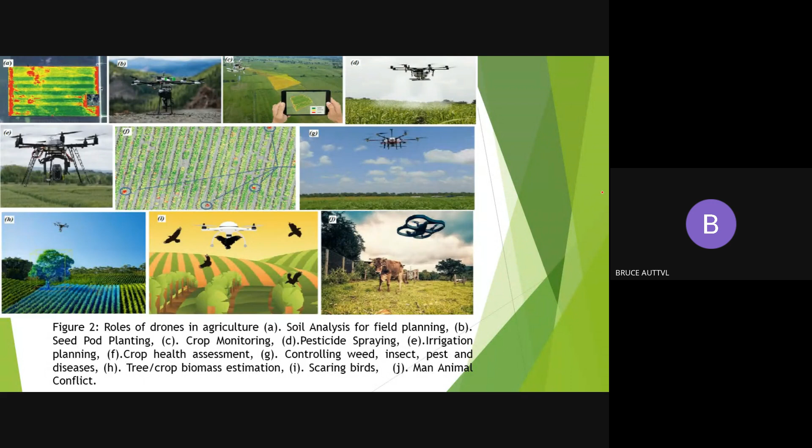So with these insights, as I mentioned, how data analytics plays a crucial role with drone technology. Then, based on the different types of drones, how we have to plan our data analysis and the hardware and the software part. Now I'm moving to how bio-inspired drones are going to transform this AI-driven drone technology.

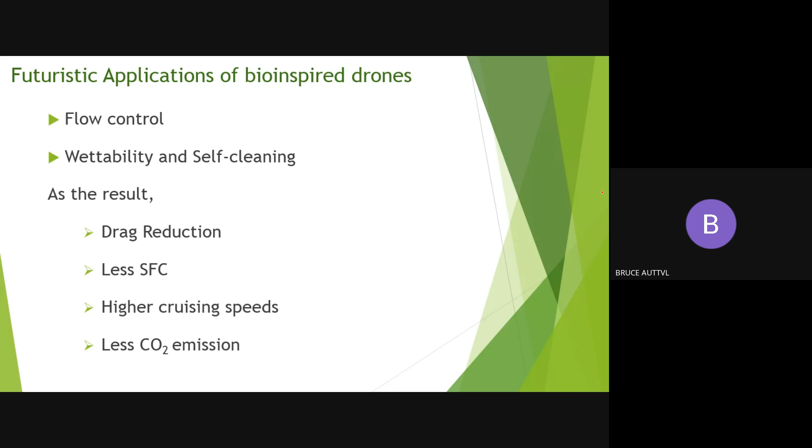For example, if you consider a super hydrophobic surface, as I mentioned about the lotus leaf, there are many surfaces which are not yet studied even. What is the surface morphology there? How can it be used in order to prepare a super hydrophobic surface, maybe which is suitable for a military garment, or maybe suitable for a military vehicle that can be camouflaged in a specific warfare? So most of the characteristics are not yet revealed.

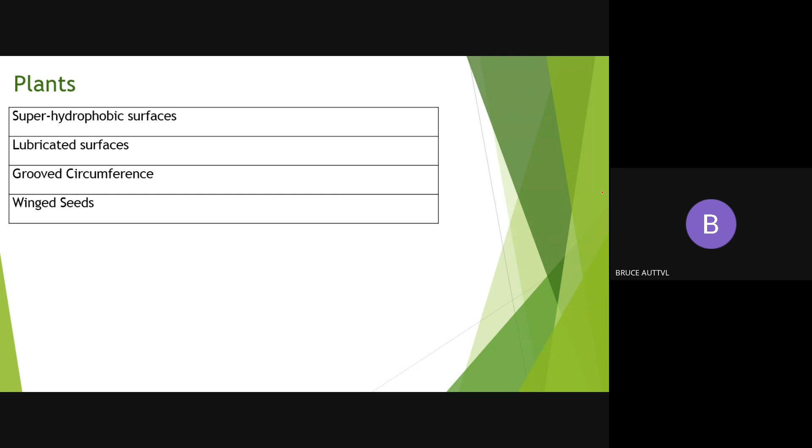Now, if you want to prepare a drone, or a surface with these abilities, you can customize this morphology with the help of advanced polymers and materials, and you can arrive at a waterproof drone, or you can have a unique application. For example, if you are able to make a drone surface with a chameleon's nature, you can easily make invisible characteristics. Maybe you can hear the noise of the propellers, but the drone may not be visible to you. So likewise, this bio-inspired technology can be adopted with drones through AI modules.

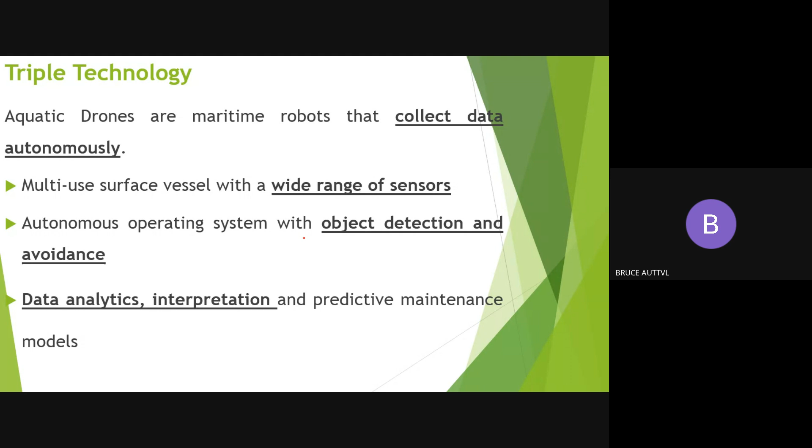Wide range of sensors can be utilized for identifying the depletion of the marine species, because the oil spillage and other various marine activities are spoiling the biodiversity in the oceans. So in terms of environmental protection perspective or in terms of security and defense perspective, these aquatic drones will be more helpful in the forthcoming years.

tethered or wireless. Mostly the underwater drones are tethered in nature because the underwater wireless communication is extremely difficult when it goes deeper, and the communication systems are also expensive in nature, so mostly it is tethered in nature. Though it is tethered, more interesting data can be obtained through these drones.

On the other side, with the help of these AI-driven technologies, maybe the authorities and the companies who manage and maintain the assets in water can use this effective data to carry out the maintenance. And aquatic drones deliver the data processing and predictive maintenance model that fit the workflows with your hardware and software.

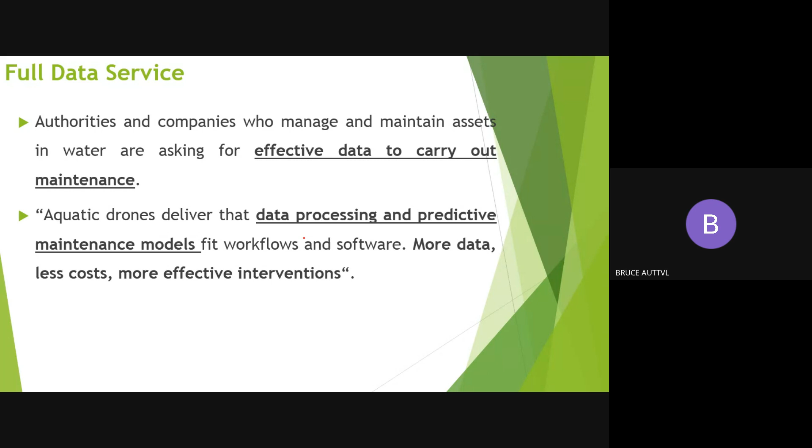month they can restrict the fishermen to protect the marine species in a particular period of time for their growth, in order to maintain the biodiversity and all. So this full data service is a possible solution through AI-driven technologies only.

So other optional systems and sensors are very similar to our unmanned aerial vehicles. For underwater vehicles also, all these hardware optimizations and possibilities towards our research are available. Here also the master hardware with a few components remains the same. You can make cosmetic changes and customize your system according to your requirement, according to the depth of the ocean where you are going to use the system.

And the softwares, accordingly the sensors and the data transmission, in what fashion you are going to transmit your data and how you are going to process it, accordingly your system can be modified. Though I am giving a broader perspective in this presentation, you need to focus on a specific application with a particular drone with a specific cosmetic change, and accordingly you have to proceed.

If you focus on this overview, it is practically impossible, and your lifetime is not enough to study the things. That much research and analysis content is available here. Okay, so that's why now people are working with BDM, that is so-called big data management tools, to handle these high volumes of data and to arrive at the AI-driven solutions in optimal time. They are trying to integrate big data analytics with AI.

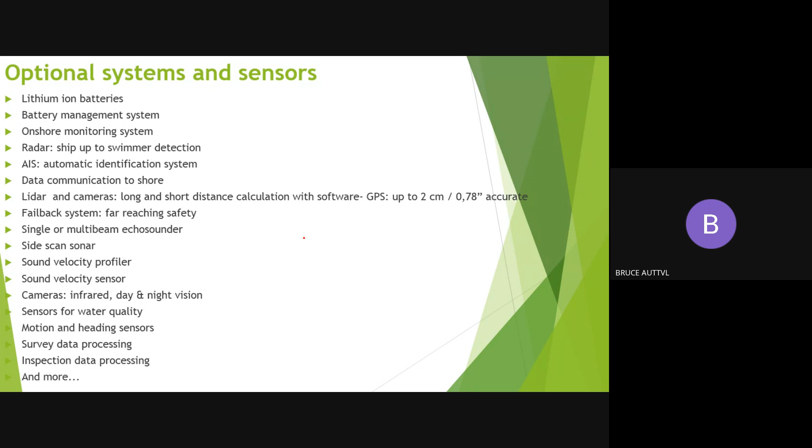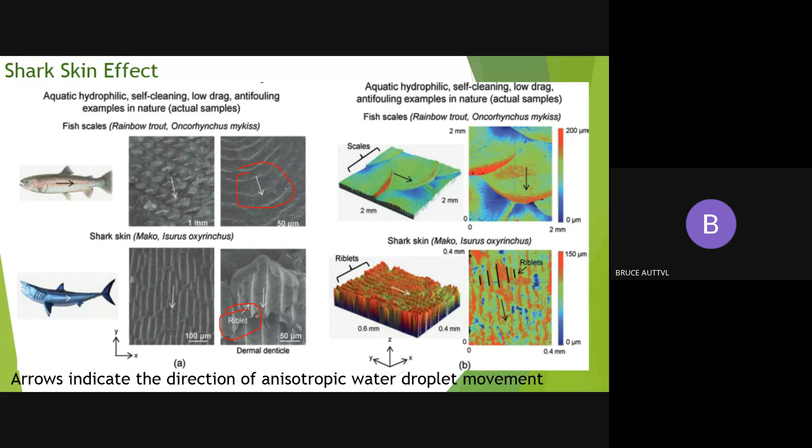Then other marine species, particularly when you talk about the shark skin, you know, there are denticles here. These dermal denticles have the potential to energize the vortices. So the flow over these riblets enhances the vortex mixing. So what happens is it reduces the drag. So based on this shark skin technology,

the company Lufthansa Aviation has developed this surface artificially, and they have incorporated this thin film for their commercial fleet. You can Google it. This is called the AeroSHARK project, and Lufthansa Cargo's entire Boeing 777F freighter fleet is incorporated with these drag reduction films. And after the implementation of this shark skin technology with their aircraft, they have identified that around 3,700 tons of kerosene is saved.

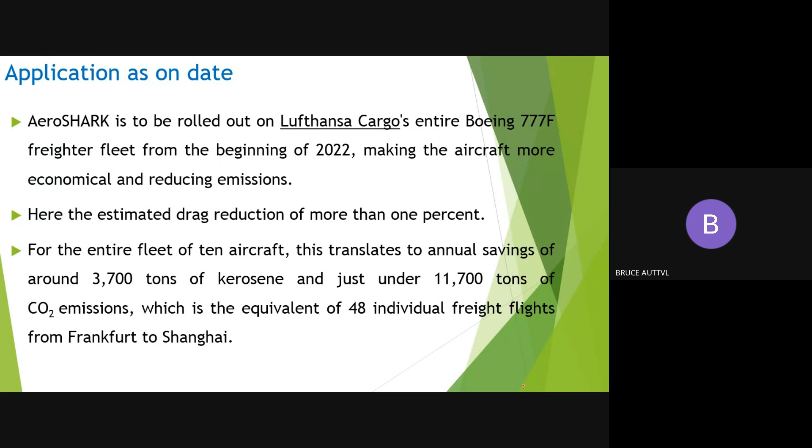Obviously, it results in 11,700 tons less CO2 emissions, which is equivalent to 48 individual freight flights from Frankfurt to Shanghai. Imagine, with the help of a bio-inspired surface, how it is revolutionizing the aerospace sector. This is the shark skin based morphology here.

So similar to shark, there are so many species available inside the ocean, and you can see these are the fish scale arrays we have studied in recent times. So each of these fish scales has the unique capability to provide drag reduction and better flow control over the surface. So if you use aquatic drones, you may catch up with the more interesting features

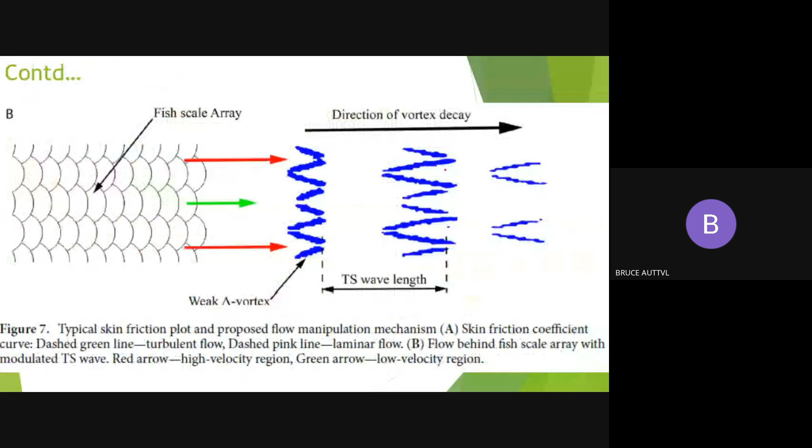of all these marine species, and those specific unique features can be utilized with AI-driven tools in order to customize your underwater vehicles to achieve better operational requirements, maybe with higher cruising speed, maybe the same technology can be utilized with your fixed-wing drone. So there is endless opportunity available with bio-inspired drones.

Though these are conventional references with a traditional approach to study drag reduction with bio-inspired surfaces, why I am illustrating these things is that AUVs, autonomous underwater vehicles, may enable us to identify more reliable and realistic features of marine species through real-time observations from the waters, and that can be effectively implemented with our drones directly.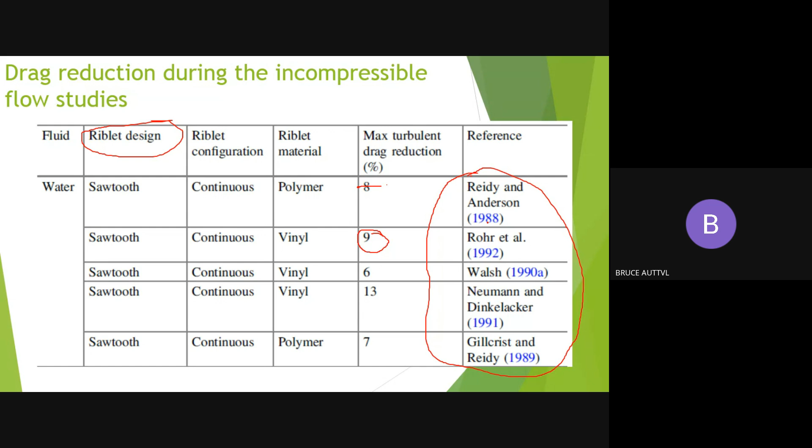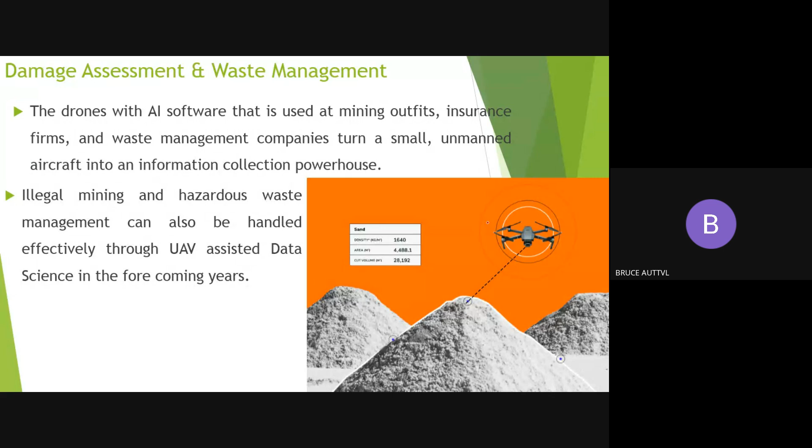So then, drones with AI software can be utilized for damage assessment and waste management. I will explain all those things in detail with the applications on the drone side, and garbage management.

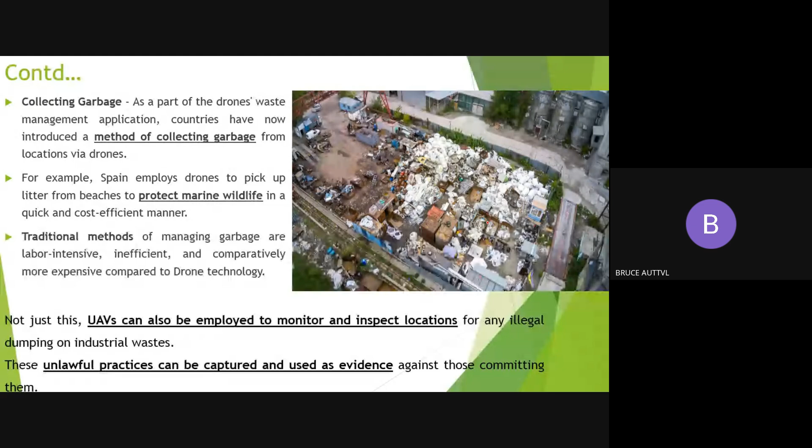We are always focusing on producing drones, utilizing it for a specific application. What about the counter drone side? People are not focusing on the counter drone side. There is a huge market that exists with these counter drone systems with AI solutions. Even in the case of counter drones with specific detection and jamming and destroying, AI is the only specific strategy to give a better success rate.